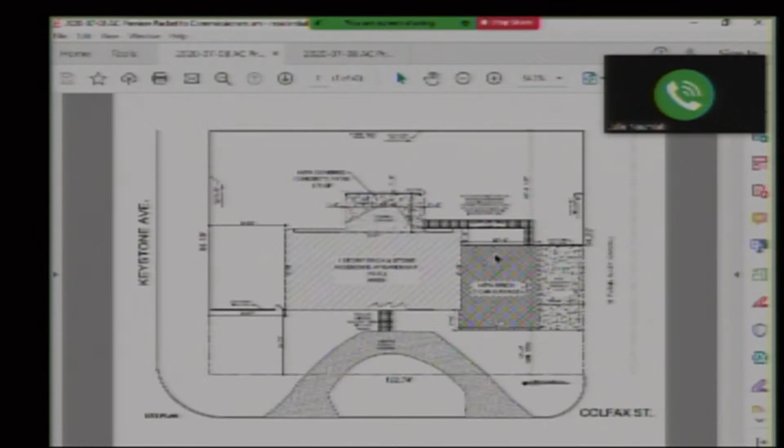I'm sorry, I didn't understand your suggestion. Yeah, I don't know if we have the kitchen shown - is it here? It's in the front elevation, you'll see it, one more, near the main entrance. Go back please. Okay, so on the upper elevation, you see the front door in the middle - that white section is stone veneer, and to the right that's the kitchen window. Yes, that one.

And the space between the kitchen window and the brick on the right is about 3 foot 8, as I measured. And the staircase to the basement would be right where the garage begins, right about there.

The staff comment was to have these roughly the same dimensions here to here, and here to basically here. So the same distance I have right there is 27 feet, and the new addition is 27.7. So it's roughly about the same thing.

And the distance from the corner to the window is 5 foot 9, which is a little too much, because as I said, I'd like to have a bigger space for shelving in between, and it would work a lot better for me to have them closer to the sides.

Do you know what the dimension is as drawn from the edge of window to the edge of brick, from here to here? Yes, 3 feet. And you're suggesting 3 foot 8? 3 foot 8, yes, to match the distance from the brick to the kitchen window.

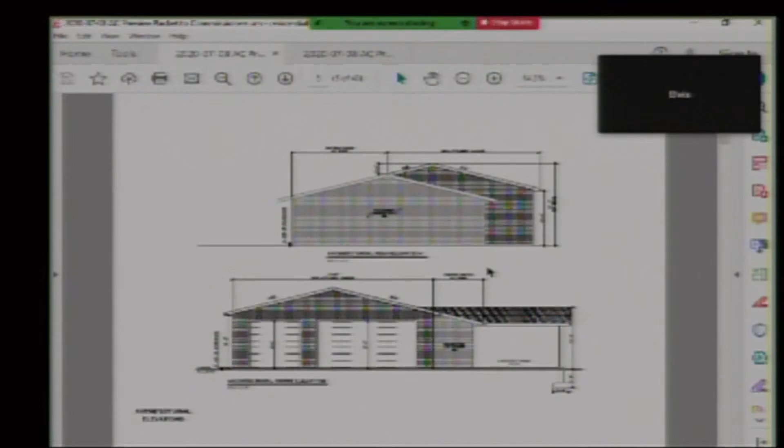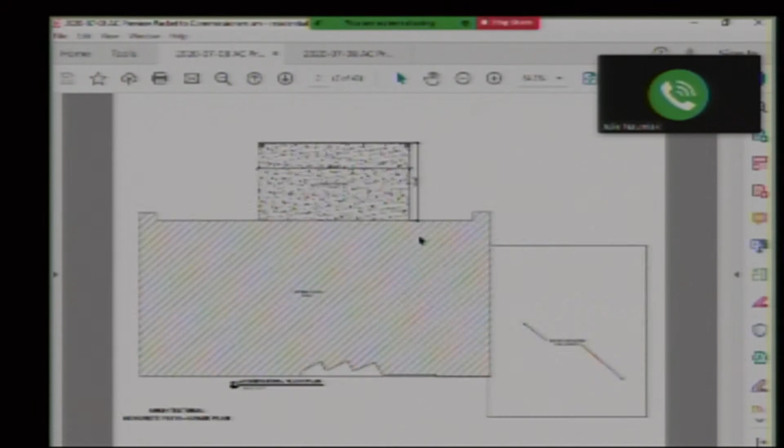Those are code items, they're not aesthetic issues. You need to have 2 swing doors, and I think the door you have in the back is a slider, and the door going through the garage doesn't count as a second exit. So it's really a code item, not an aesthetic item.

Okay, so it's just this door, yeah, here. Okay. So, commissioners, I haven't heard any other comments. I'm in favor.

Do I hear any motions? Yeah, I can make a motion. I'll make a motion for case number 2020-027A, 9858 Keystone, as submitted, with the revision of, as explained.

I'm sorry, Jay, say that again? With the revision as explained by the client, he's going to make the same elevation and same height.

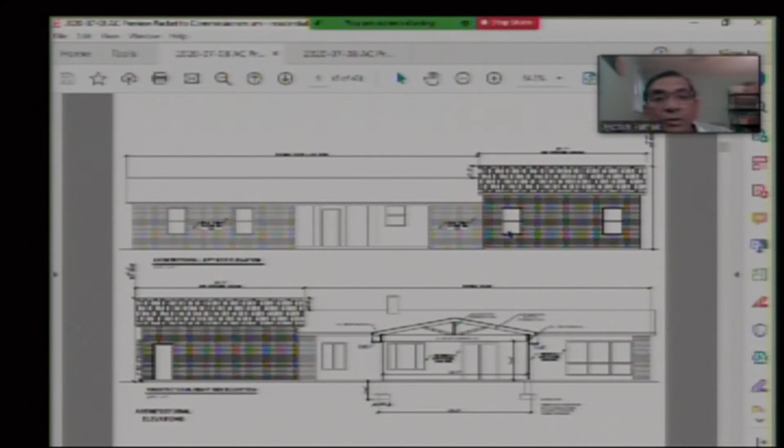Jay, just the wording that we're looking for is instead of 3 feet from the corner, it'll be 3 foot 8 inches. So he's agreed to make 3 feet 8 inches instead of 3 feet from each side.

From each, yeah. Does anyone second? Correct. Second. All in favor, say aye. Aye. Any opposed? No opposed, so passed. Thank you. All right, thank you. Thank you.

The next case is case number 2020-028A at 6834 Leclerc Avenue for Johnny Kapelnus. I apologize if I butchered that name.

Could you be sworn in, please? Actually, Thomas will be the one representing the case tonight. Okay, petitioner being Thomas Budzik. Tom, you there? Yes, I'm here. Do you swear or affirm that the testimony you give tonight will be the truth, the whole truth, and nothing but the truth? Yes. Thank you.

The comments from the staff are that staff has no objections with the overall design, specifications for the fiber cement material, and color samples will be provided at the meeting.

Was that done, Carrie? Were the samples submitted? Yes. I had to extract some because they were big files, so we might have to talk through a little bit of it, but we do have the colors for sure. Got it.

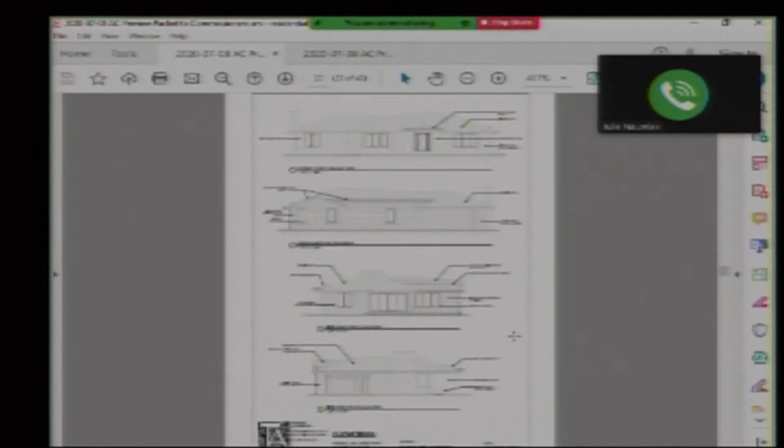Okay, so this is the corner of Farwell and Leclerc. And it's an addition. You can zoom in a little bit. So, replacing windows.

This is the garage. And here are the color samples: classic linen for the color scheme, and then rustic black for the shingles. And this is the neighbor across.

Terry, could you point out the windows we were talking about on the corners? Where the... hold on, one sec.

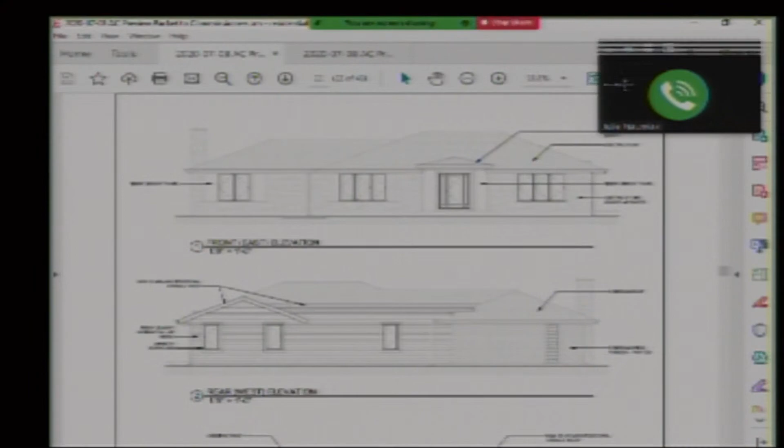So we need to, I think that fixed it, okay.

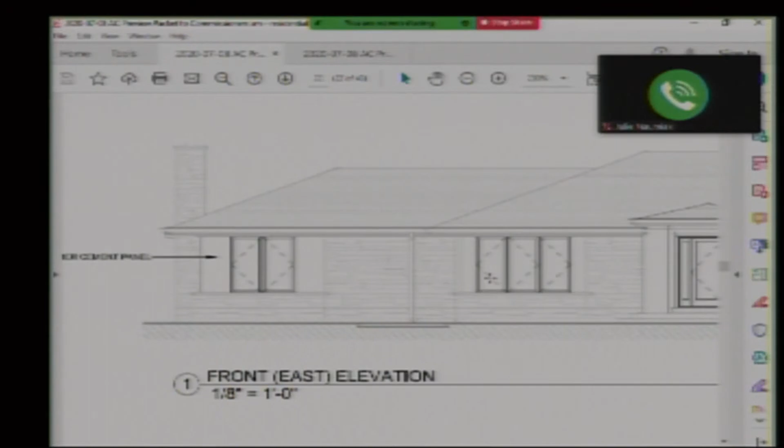So the existing windows currently take up this area here, right? And they're being replaced. Thomas, did you want to say anything? Sure, so this is an addition to a ranch home. The existing home, the elevation you're looking at currently, the living spaces were all on the left-hand side of the home. It was the owner's intent to have the living spaces closer to the backyard, which is on the right-hand side. So as a result of that, we now have children's bedrooms on the left-hand side. So rather than have very large banks of windows, we're doing something that's a little bit more appropriate.

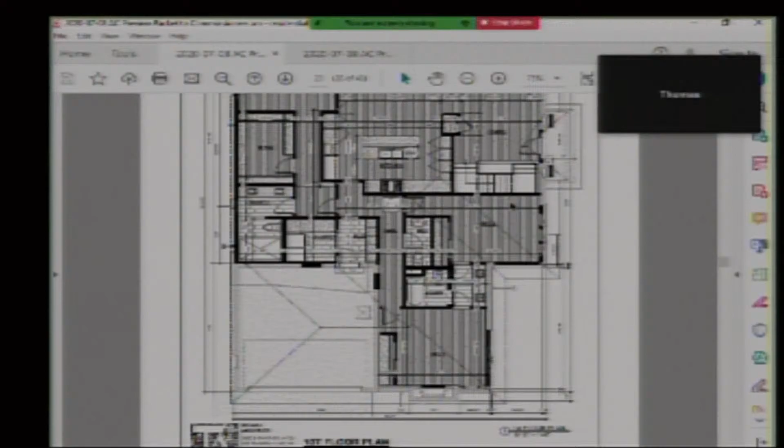For a bedroom, the infill spaces between, in the areas that are left over, those would be in fiber cement panels in that linen color scheme to pick up on the linen color that we're using for the horizontal lap siding in the addition. So that's the reasoning behind the infill panels like that.

So are you recladding that entire elevation? No, the existing elevation, it is field stone on the front, okay, so that stays. It's just that those two corners are currently very large windows. We're just going to be reducing the width of those windows. The height is going to be the same. And the infill is to be taken up with cement panels? Yes, fiber cement panels to pick up on the color of the siding for the original.

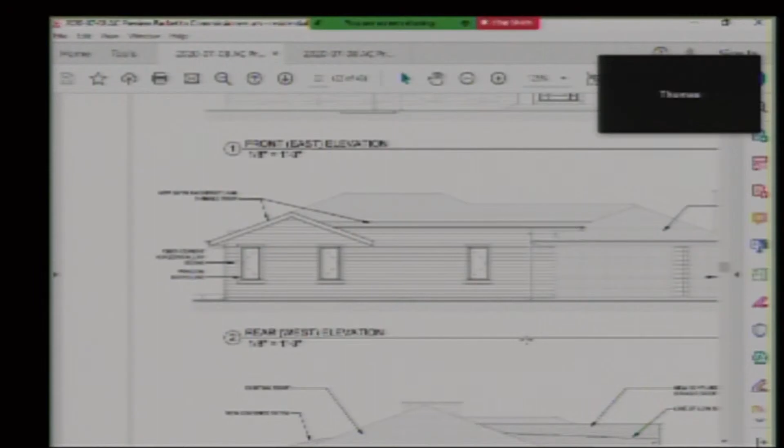Is that shown anywhere? I mean, that shows. Carrie, can you put up the picture of the house maybe? Yeah, that would help?

And Thomas, are all four sides collectively at least 51% masonry? Yes.

So this is, Carrie, point out the large windows on the left side. Yeah, so this is one of the large windows, and this is the other one, the elevation that we were looking at.

So the cement, the Hardie panels, the cement panels will contrast somewhat with the kind of tannish stone, yes? But will be consistent with the window frames and door and trim. Is that correct, Thomas? That's correct.

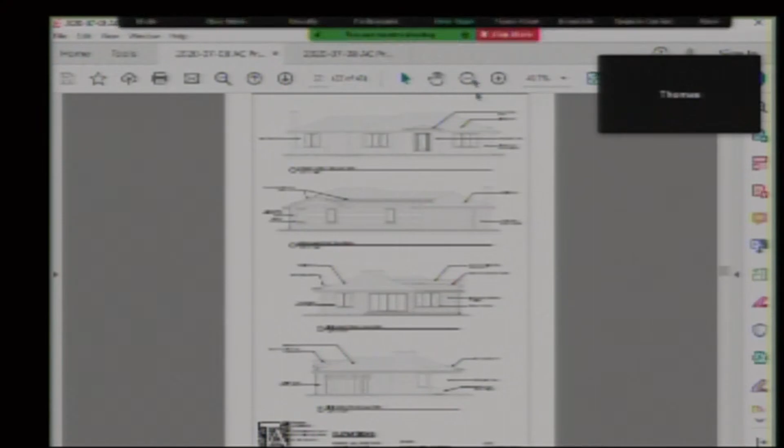And Carrie, could you go back to the elevation which shows the window with the panel? All right, got it. Commissioners, any comments there?

There's been no public comment on this item.

Hold on one second, see if Mary Jane wants to make a comment. Mary Jane, do you have a comment? It looks okay to me. Okay, thank you, Mary Jane. Anyone else? Julie, it looks fine. I'm okay. Jay, you're okay? Thank you. Arshana, did you say you were okay, Arshana? Yes, thank you, it looks fine. All right, I don't have any problem with it.

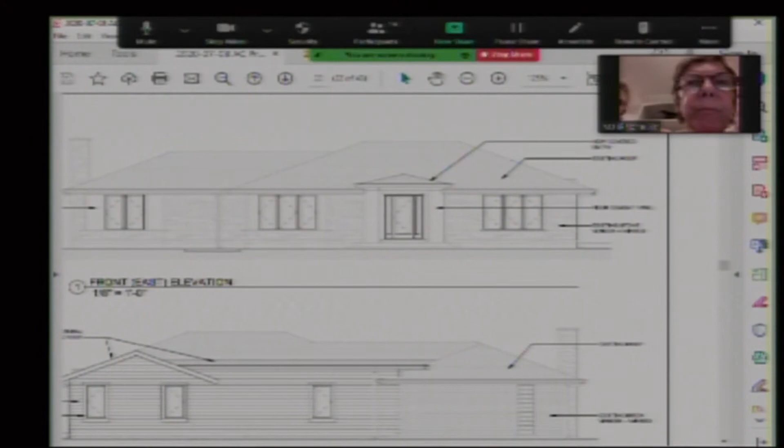Mary Jane, are you okay to make a motion? Yeah, I need the number though, could you give it to me? Yeah, hold on one second. Sure, it's 2020-028A, 6834 LaClaire. Leclerc. Yes, correct. I move that a certificate of appropriateness be granted to case number 2020-028A at 6834 LaClaire as presented.

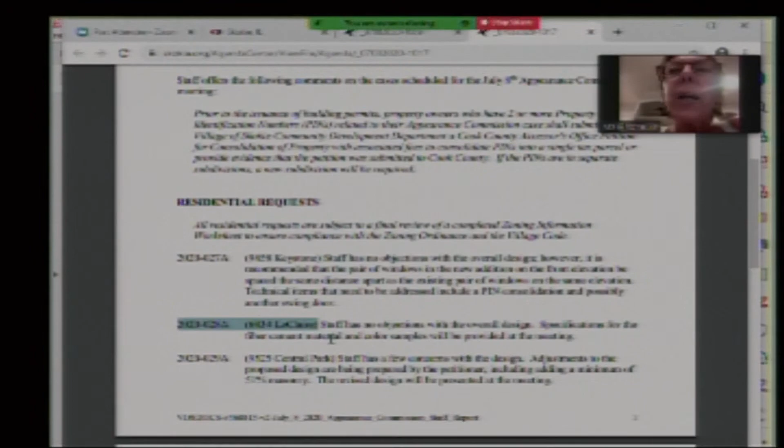Anyone second? Second. All in favor? Aye. Any aye. Aye. Any opposed? No opposed, so passed. Thank you, Thomas. All right, thank you, thank you.

Carrie, do you have Julie muted? There we go, all right.

The next case is case number 2020-024A, 4605 Golf Road for Golf Medical LLC. This case was continued from June 10th. I presume. Tom, yes, did you skip Central Park? Yes, I did, I'm sorry.

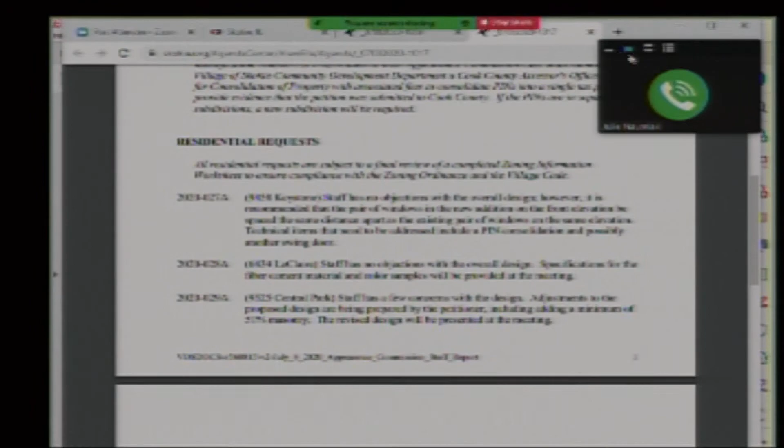Enrique, hold for a little while longer, I just wanted to hear from you. The next case is 2020-029A at 9525 Central Park for John Marco. It's this one, for John Marco. Petitioner Robert Cirzega. Cirzega. Thank you. Thank you.

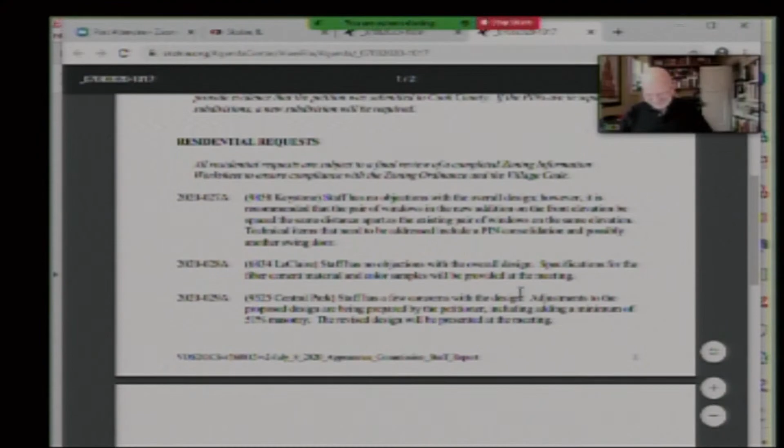Can I swear you in, Robert? Yes. Do you swear or affirm that the testimony you give tonight will be the truth, the whole truth, and nothing but the truth? Yes. Thank you very much.

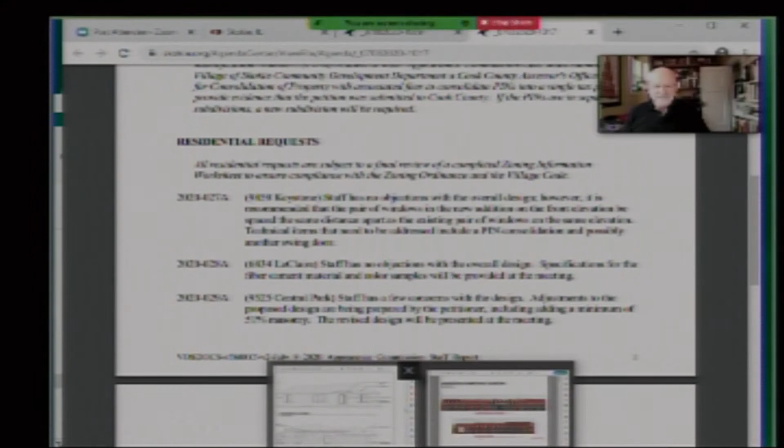The comments from the staff are, staff has a few concerns with the design. Adjustments to the proposed design are being prepared by the petitioner, including adding a minimum of 51% masonry. The revised design will be presented at the meeting.

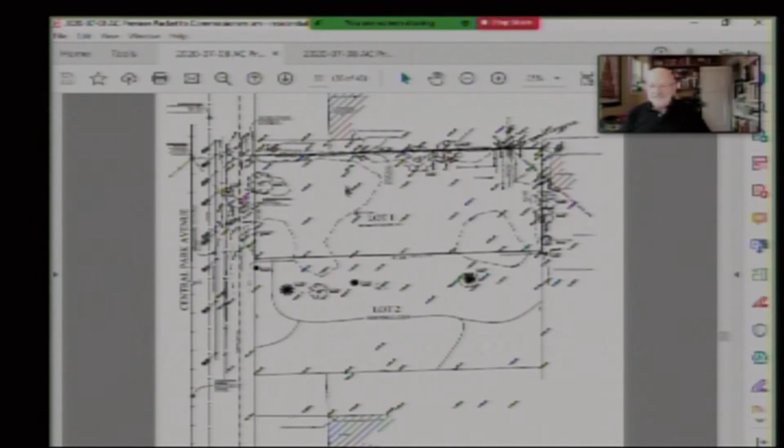And they, so, have, Carrie, so will we see the original, or will we see the revised? I just have the revised, but it's primarily the material, the facade material, and not a change in the design specifically to the house itself. Okay, all right. So it's, I believe it's lot 1, correct? That is correct. Okay.

I'll zoom in a little more. So, new house.

Without commenting on the materials, my question is, it seems like a small house for the lot. Am I wrong? It's not a small house for the lot. We're under what we can build, but...

John Marco wants a single-story home, so we go deeper into the lot, but we can't really build much bigger than this according to your code, and we don't want to anyway. I know the site, that's why I asked, so I was expecting something larger, but that's okay.

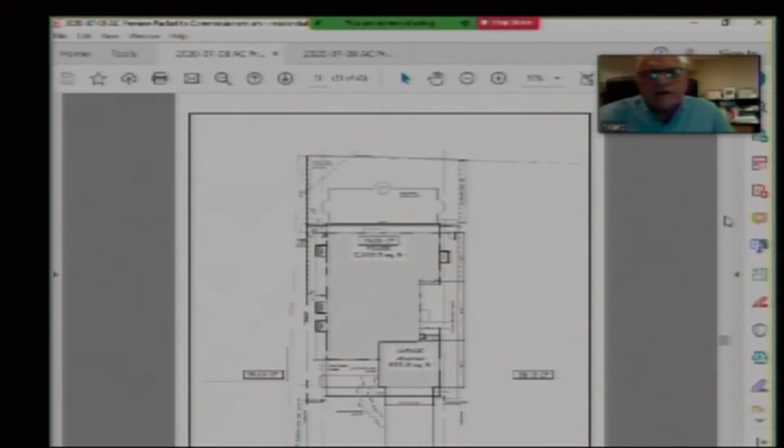Well, there's 2 lots, and we only have 1. It's huge right now, but we only have 1 of them, and we have the smaller of the two. So this lot was split into 2 properties. You approved the house next to it a couple months back. Yeah, I think it's a story and a half, I don't think it's a 2-story either, if I remember. So it was a double lot that was split into 2. Yes, perfect, now it makes more sense that way.

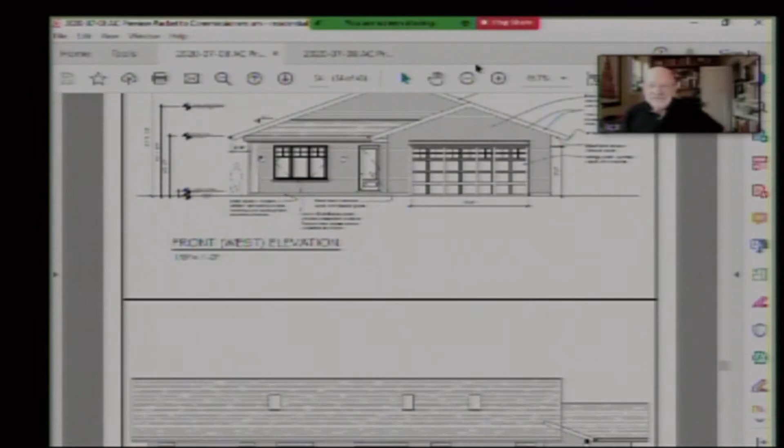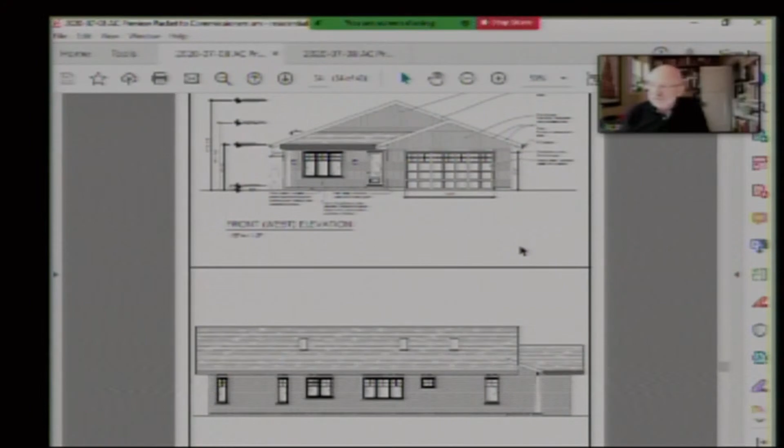Robert, do you want to tell us a little bit about what you're doing? Well, the main change was the house is 100% masonry of brick veneer. My original proposal was to have siding, and I somehow missed that you have to have 51% masonry. So we changed it all to brick. So the entire house is 2x6 frame construction with brick veneer throughout the entire house with limestone sills.

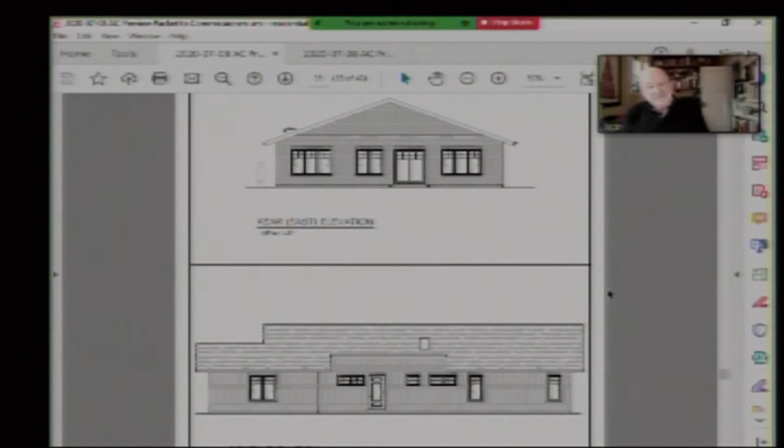The windows are Marvin casement windows, clad. Not sure what else - color scheme? I sent it, there you go. That's great. The rest of this didn't change, it was just the brick. These are the neighbor houses here.

I'm okay. Commissioners, comments? Looks good. Looks good. Thanks, Julie.

Thanks, Arshana. Nice to see a one-story. Yeah, I'm not bothered by the 1-story. There is another 1-story house a few houses to the south. I think that's correct. Yeah, I think we're okay with it, Mary Jane, regardless.

I was mistaken, I thought it was both lots that the house was being put on. Oh right, it's only 1 lot, correct. So, half that. Arshana, can you make a motion, please?

Any public comments? There have been no public comments on this item. I make a motion for this house located at 9525 Central Park, as presented.

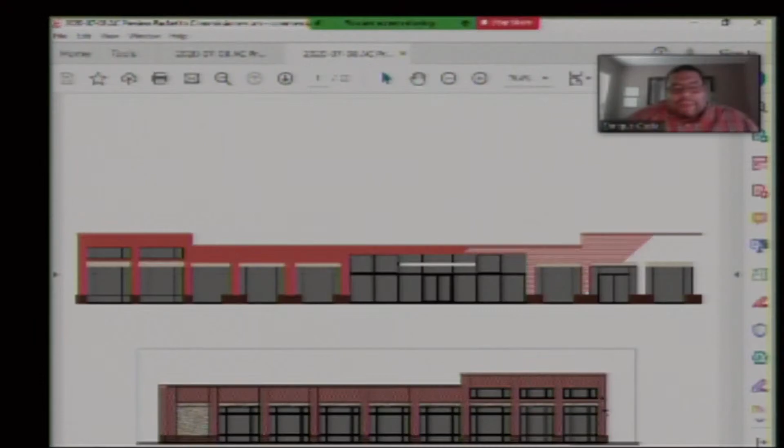The staff has no objections with the design, subject to building code support for the areas covered by a thin brick veneer. Okay, I like it already. So basically, talked to the owner, took your advice. We balanced out the building on both ends to have both sides lifted up to kind of match.

I left the windows, I cut down the windows on his side down to just the one, because he wants a higher ceiling in that area. Like as pointed out in the staff report, I did change it to a thin brick over the old EIFS areas, and then basically it's going to be real brick on the addition side.

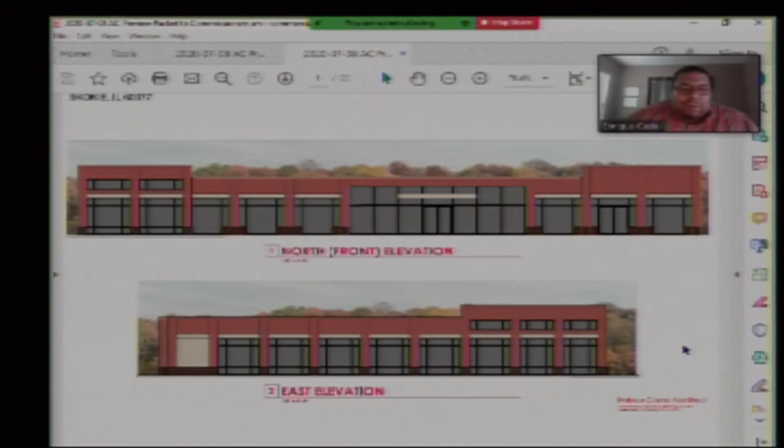I changed the color scheme a little so it's not white anymore, more of an earth tone on the bands, and same with the top. I think the coping right now is actually a light brown. So with the red brick and turning the bands from white to tan, including the three canopies that stick out that are metal and black right now, I changed those colors too, so it's more consistent along the entire facade around the whole building.

I think it looks great. Thank you. Any comments? Can you have the same band in front of the headlight instead of having brick all along?

Archana, we can't make out what you're saying. I apologize. Can we have a band around in front of the headlight instead of having brick all around? I didn't catch the first part, though.

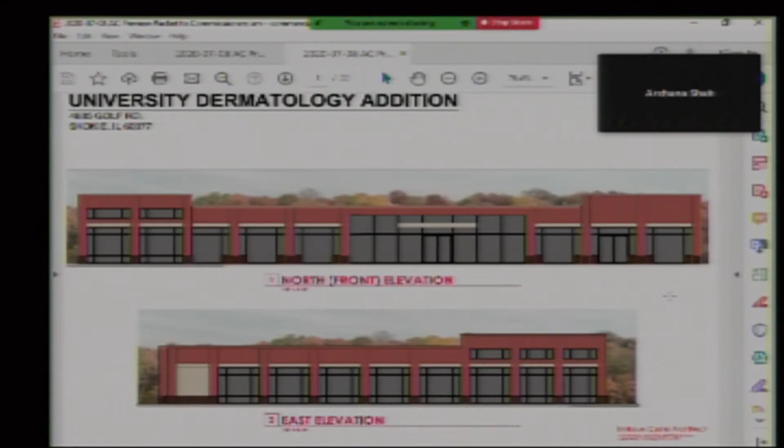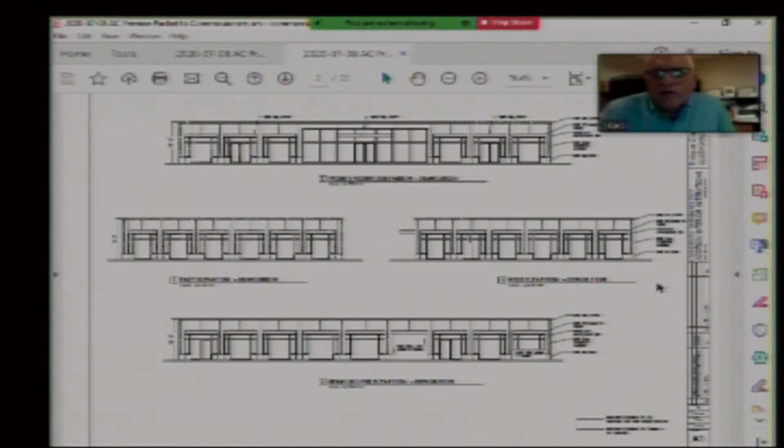I was just trying to spruce it up based on the last comments we had. If you look at the brick elevation on the front, I think the brick makes it look richer than trying to do a band of EIFS. The brick does give it a richer look, in my opinion.

I'm with you, Nathan. Anyone else? Mary Jane? I'd rather see all the brick. Mary Jane, anything? No, I don't have anything to say for this one.

All right. I'm sorry, Archana. I'm not apologizing yet. Any public comments? There's no public comment. Thank you. Julie, would you like to make a motion? Just give me a case number and I'll do it.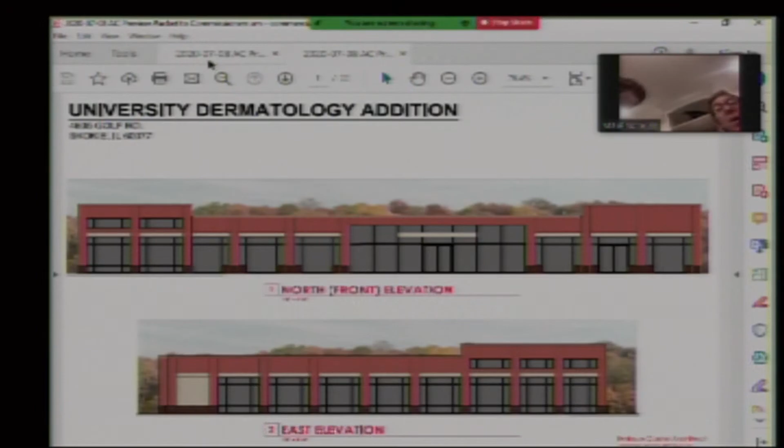2020-024A, 4605 Golf Road. I'll make a motion that a certificate of appropriateness be granted in case 2020-024A at 4605 Golf Road as presented.

Does anyone second? Second. All in favor? Aye. Any opposed? No opposed, so it passed. Thanks, Enrique. Thank you, guys.

The next case is 2020-025A at 8001 Lincoln Avenue for Imperial Realty Company, a signage submission, petitioner Julio Rufo. Are you here? Yes, I'm here.

Welcome. I need to swear you in. Do you swear or affirm that the testimony you give tonight will be the truth, the whole truth, and nothing but the truth? I do.

Thank you. The staff comments are lengthy. The staff has concerns with the proposed wall signage on the west and east elevations, as they are located above the second floor windowsills and have nighttime illumination facing existing and proposed residential uses in a mixed use building. The building is located in downtown Skokie and is zoned CX Core mixed use, where the sign code calls for pedestrian scaled signage below the sills of second floor windows. Although the east facade faces a parking lot, it does not have a business entrance or a display window, so it cannot be approved without relief from the sign code. The west facade faces Lincoln Avenue and has a business entrance and windows, but an existing wall sign already exists, so it also cannot be approved without relief. Both signs are proposed above second floor windowsills, necessitating additional relief from the sign code.

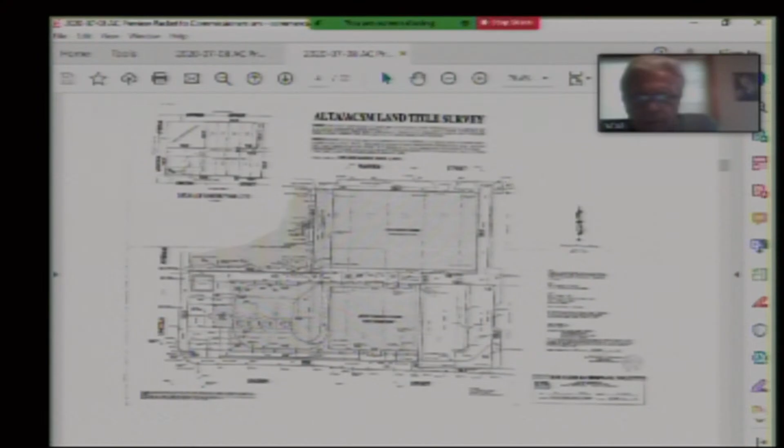I don't know that I'm clear on where they are. Sure. The signs are at the very top of the tower, just below the parapet wall, located towards the south end of each facade. The idea is to provide a little more presence for the building, to give it some life, and to make it easier for people coming from the east and the west on Oakton to identify the building and find where they're going.

Right now, a good portion of the property is vacant. Chase Bank moved out roughly about a year ago. We need all the help we can get to activate the property and help tenants and other people find the building. We thought the signage at the top would add some life and activity in that area, and again, we're looking for all the help we can get to help market the property.

Nathan, help me out here with regard to the comments being above second floor windowsills. I was confused by that. It's not the second floor that they're above, are they? Or, I mean, they're at the top of the building. Yeah, hold on, Nathan, you're unmuting.

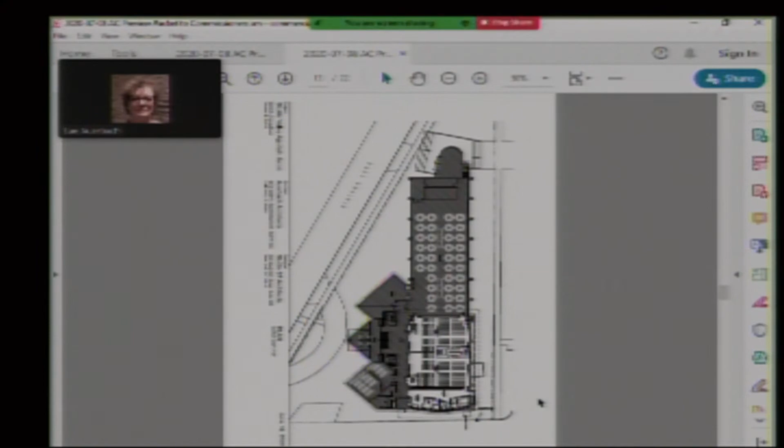So we are turning it and renovating the entire sanctuary space. In doing so, for both acoustic reasons as well as aesthetics, we are adding a skylight above, as well as clerestory windows, which you won't be able to see because they're from the west, and there's a huge awning below it, a lower roof below it. And on the east side, which you're seeing now, we're adding another egress stair, partly for security as well as for egress. So those are really the only big changes affecting the exterior of the building, and a couple of random windows on the south side.

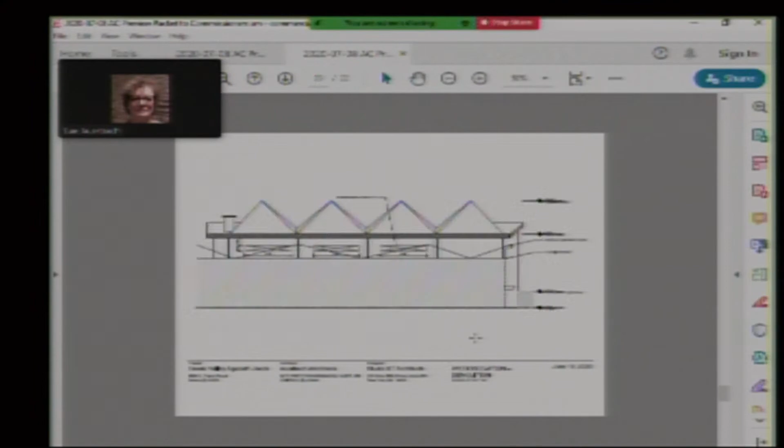We are changing the existing windows on the east side of the building. Right now, all we're doing is replacing them in kind. There's no change of size or really material. I mean, it's still a metal window.

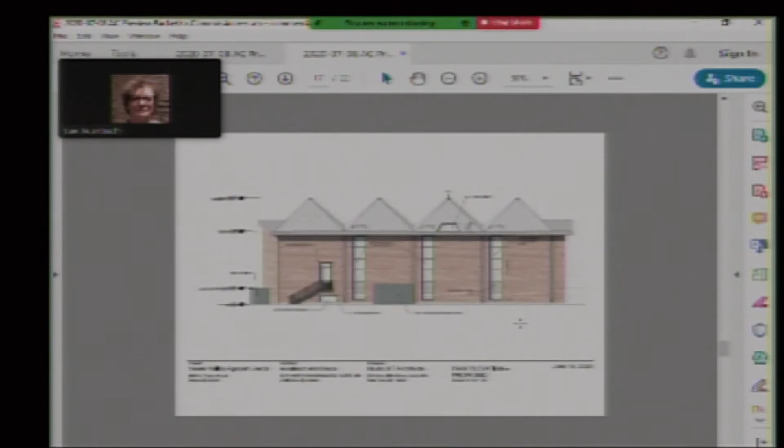So on that elevation there, we're introducing a door with a stair and a railing. And the skylight, again, is going to be a little higher than even shown there, so it would be very hard for almost anybody to see it from the street. You'd have to be in a much taller building, and I don't think there's anything tall enough nearby.

And that elevation, you're adding those pillbox style windows? Exactly. Again, this is against an alley, so it really doesn't affect almost anything. It just brings a little bit of light into a bathroom area.

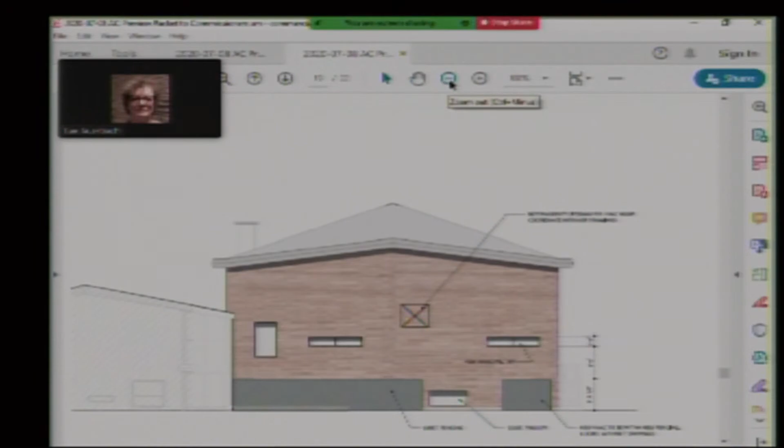Sure, go back to that please. The X marks the spot, what is that for? Sorry, that's just HVAC equipment. There is an opening there right now, and that's actually one of our options. We wanted to have that option for us, but it's still under consideration. It may be kept exactly where it is, and we may not need that opening. It would be a louvered opening if it is. It's not going to be a window-mounted air conditioner. No, oh no. It would just be louvers to an outside, to an interior furnace. Okay, got it, thank you.

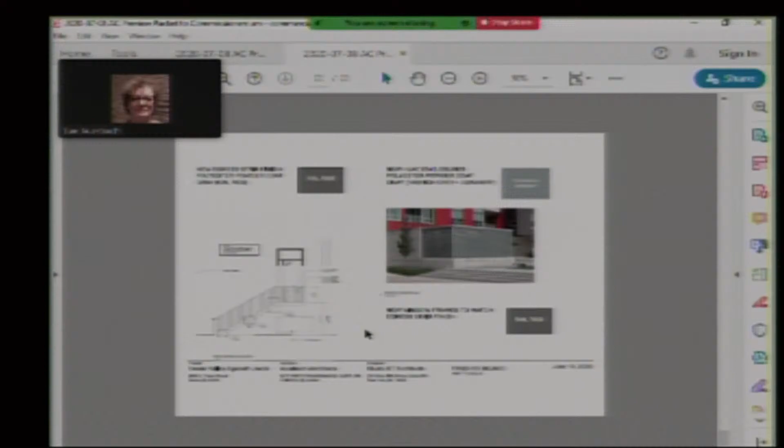And I thought I saw something at the front elevation, what's going on there? Well, this isn't the front, these are just the materials. Oh, that's just showing you if we have to do a new enclosure for the HVAC, it'll have that material. It'll be a metal material and it'll be powder coated.

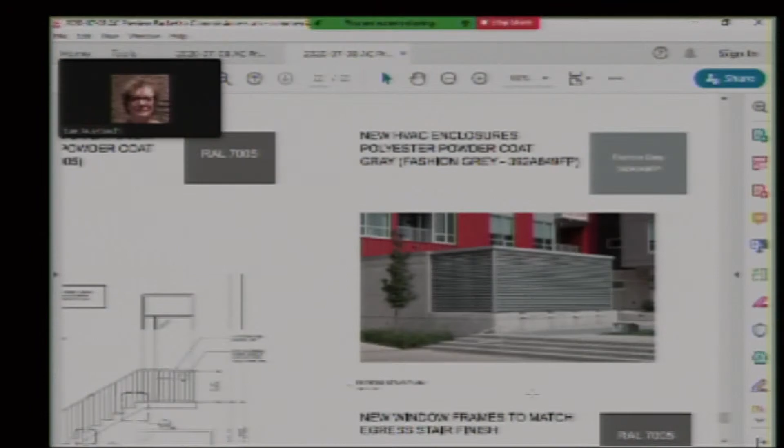So is there an existing HVAC unit that's exposed somewhere that might need it? There is, it's on the south side, towards the west. That's in the alley. Okay, exactly, gotcha, looks simple enough. I don't have any issues with it.